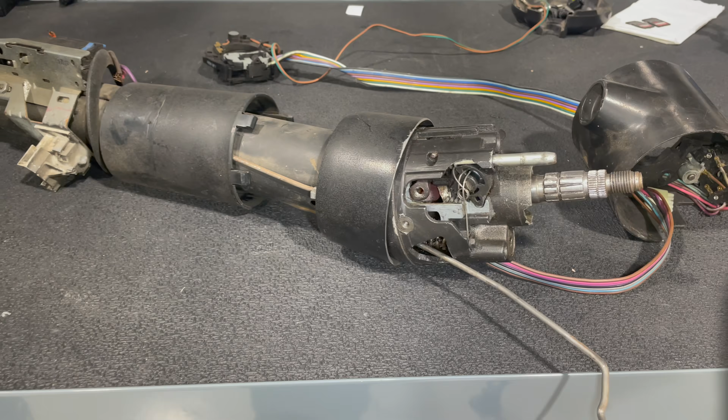Here is the column out of my Blazer that I replaced with an Ididit column several years ago. This guy is obviously broken, and that's the challenge with this. It is an aluminum and steel construct, and if you're not careful, you can end up breaking either the collar down in here, which this bolts to and tightens everything up, or you can break this guy, and then you're kind of out of luck.

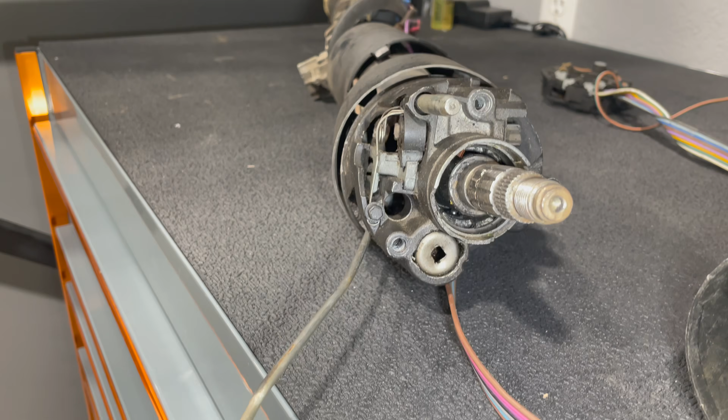These things are hard to find. You can pull them from junkyards, but they often need a rebuild. So if you can take care of your column, treat it well, you'll get a long life out of it with no problems, and they're fairly easy to service before you break anything. Once you break some of this stuff, all bets are off.

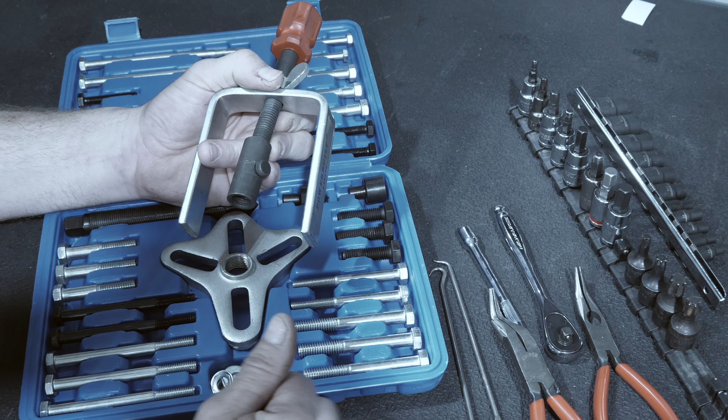There's just a few tools you're going to need for this job, or tools that will make your life a lot easier. First and foremost is this guy, used to depress the plate that is holding the retaining spring in place. You thread this down over the center nut or center bolt on the column, and then use this wing nut to depress these legs, which will hold the plate down. Then you can use some picks, a screwdriver, pliers, assorted needle nose, whatever it takes to get that lock ring off. It can be a little finicky, and these tools can make a huge difference.

The other thing you're going to want is a steering wheel puller. It goes over the column like so. This guy is driven down inside, and then this pin pushes down on the column while this pulls on the steering wheel and pulls it off. These are very useful to have. Just grab one, put it in your toolbox. You'll be happy it's there when you need it.

The other thing you're going to need is an Allen key set and a Torx set. I recommend just buying an assorted set of Torx. These are the ones you're going to need: this is a T30, needed to remove some Torx heads inside the column. In addition to that, you're going to need an E8, right here. That's what these look like inside. That's what you're going to want to tighten the bolts when we get down to it. A quarter-inch drive is the best way because it's much thinner than a 3/8. So if you can get a quarter-inch drive, you'll be ahead of the game.

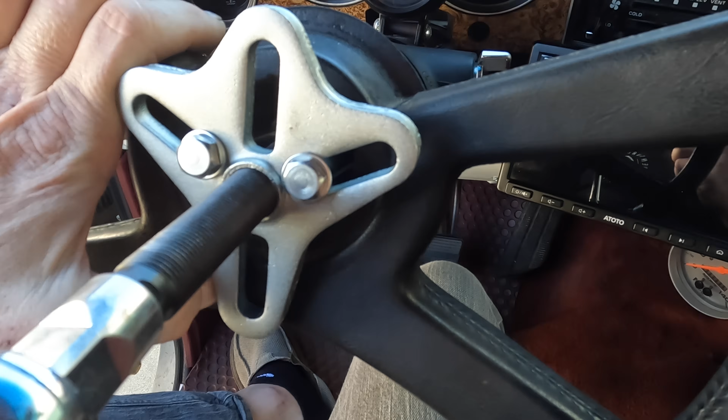Let's take this one apart and see if we can fix it. When you put your steering wheel puller on, put the washers under the bolts that correspond to the holes that you've got. Make sure it's lined up so it's not going to torque. Then you're just going to tighten this guy down until your steering wheel comes off, and you're left with that.

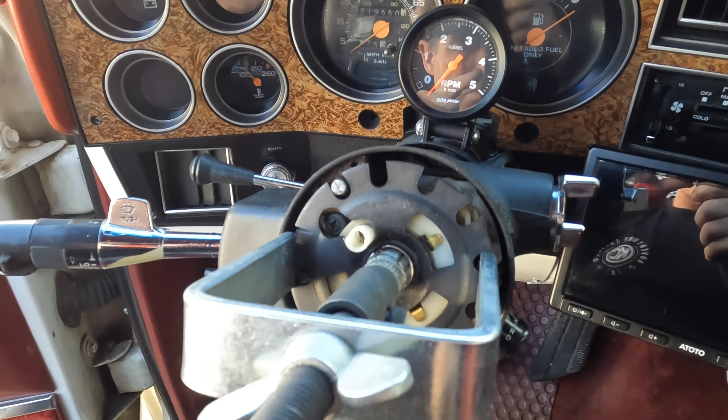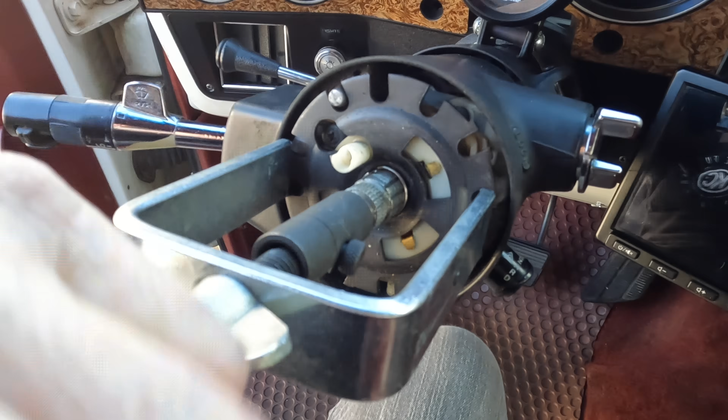It's going to make your life a whole lot easier if you have one of these tools. This is to help remove that snap ring down in there, and to get it out. Let me back this off. You'll see as I back off this wing nut, this plate is held on by this. So to get that snap ring out, you need to depress the plate so the snap ring can come free. It's possible without this tool, but it can be a pain in the neck.

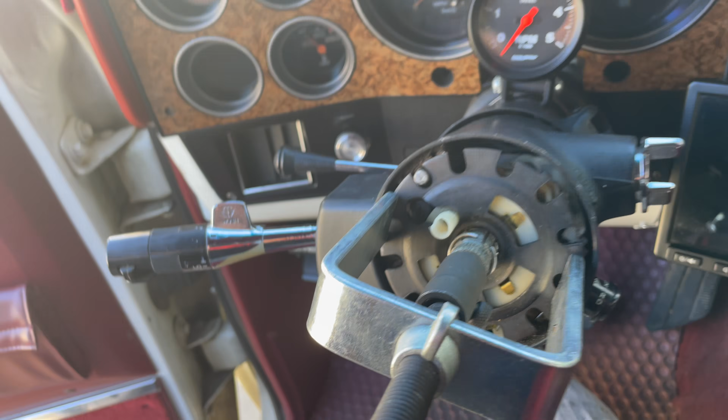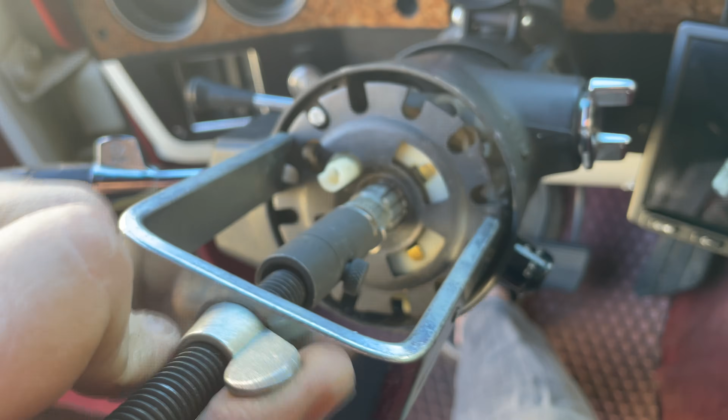A combination of pliers and picks is usually the best way to get this guy off. Then you can release the wing nut, and this backing plate will come off.

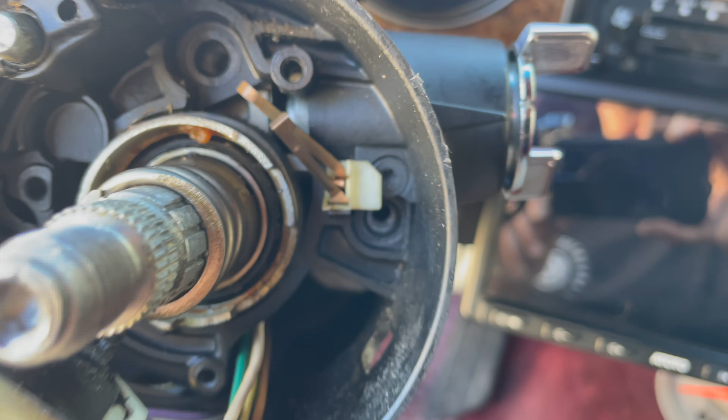Next, you're going to want to remove these T30 screws from here, here, and down there. Once those are out, you'll get to this one right here, can you see that one? That one releases your lock assembly. Once you've pulled your column adjust, this assembly should slide off.

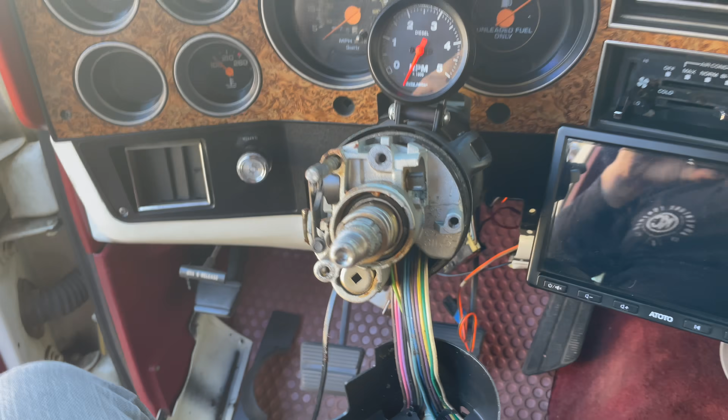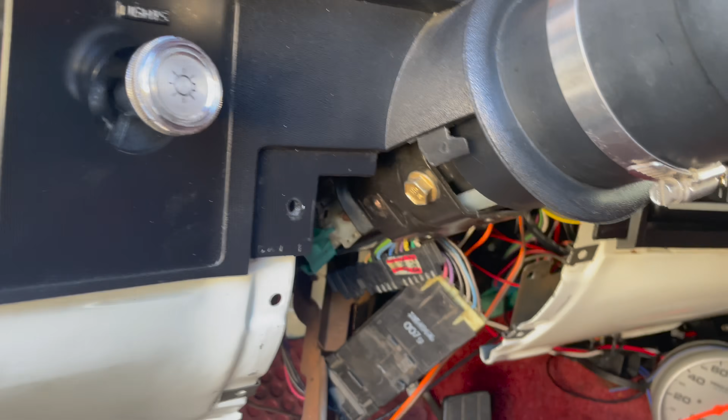So this next part is a little tricky, but don't stop, you're doing awesome, so just keep it up. To get this assembly off, you're going to have to remove these two bottom panels. It's just 2 or 4 screws on each side, not very difficult.

Remove that stuff and then undo this guy so you can slide your connector back. That will give you enough slack to get the safety collar off of it.

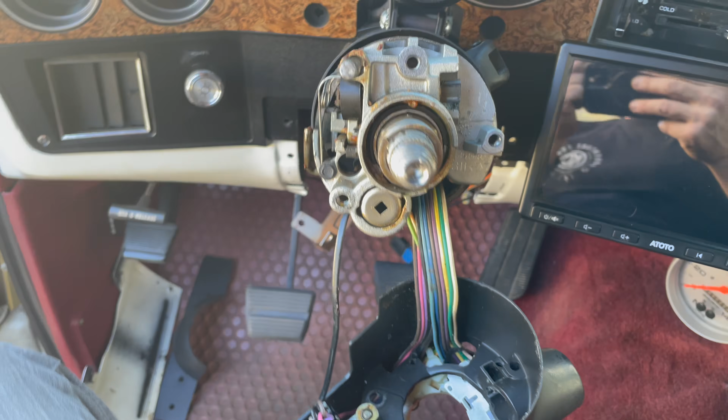Now some stuff will fall out of this, see? So I'm going to have to figure out where that goes, but don't stress it, you're doing awesome. Do you guys see that one down in there?

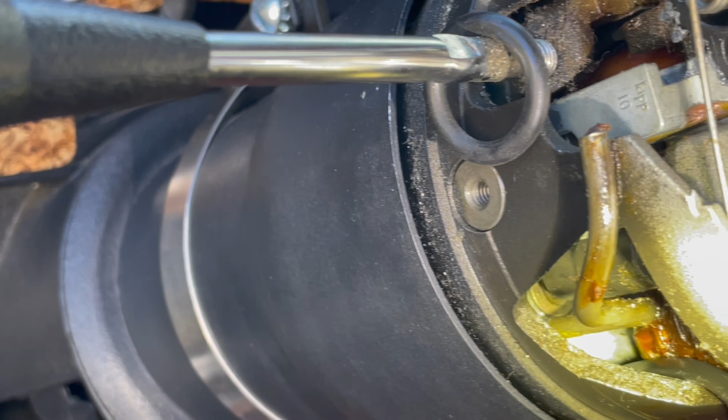So look how... I'll get you to zoom in there. But you see how loose it is? That's our problem right there.

Let's tighten this guy up.

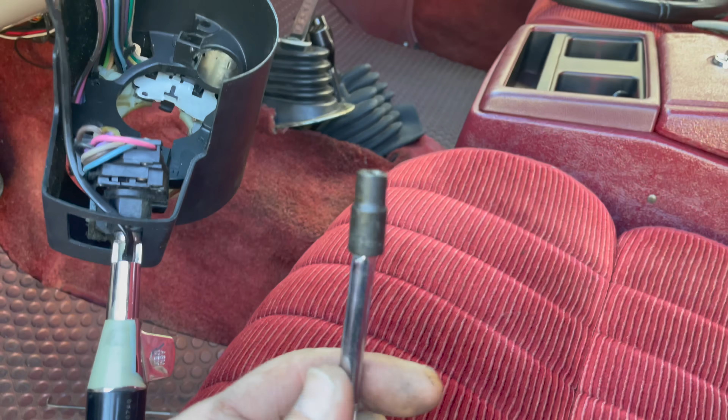This particular bit is an E8, that's what you're going to need. I'm using a 1/4 inch drive to get all the way down in there. I think I've still got another one to get to also.

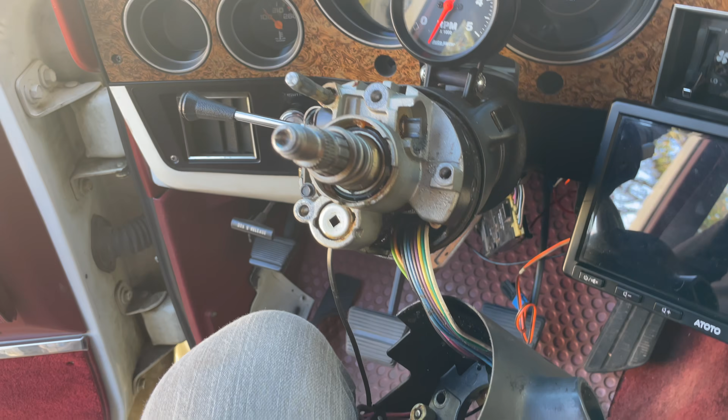Okay, so it looks like we had success, no more movement to this thing. So let's button it back up, and hopefully it functions the way it did when we took it apart. That's the real test, right?

Once you've got everything back together, make sure to put that lock ring back in. You'll need the tool to push down the plate and get it seated. Then you should be ready to put your steering wheel back on and celebrate how awesome you are.

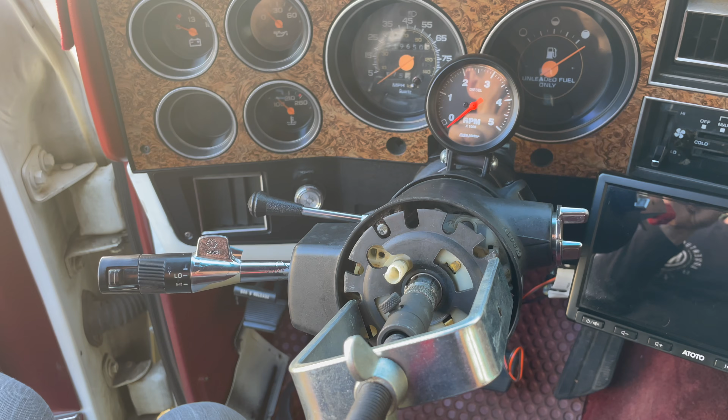Now, after you've finished, make sure you have some spare parts left over so you can practice pulling it apart and putting it back together one more time. You thought the lesson was over. Now go ahead and tighten it up again, and take a look around and notice you don't have any spare parts, because you did an awesome job. Give yourself a high five.

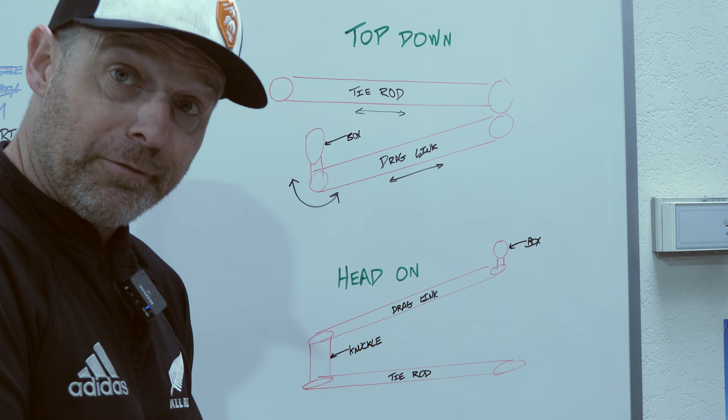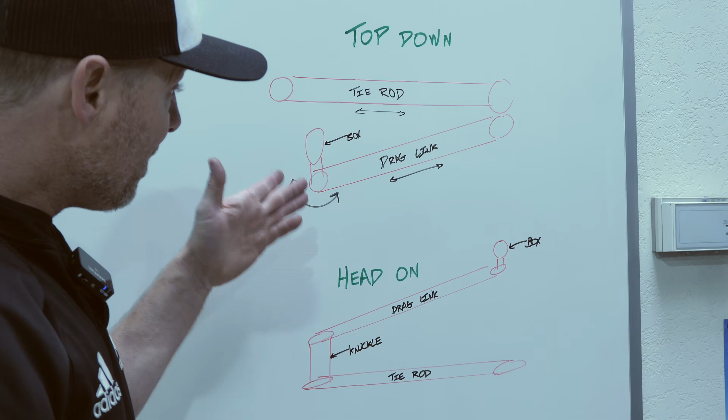I want to give you guys a quick run through of the names and parts of my steering system, because I'm going to be fixing the cockeyed steering wheel that has been plaguing me. I have to drive down the freeway with my steering wheel 90 degrees off to maintain a straight direction, and that's because my draglink and tie rod need adjustment, or my draglink needs adjustment.

So in my situation, we're looking at the top down, a bird's eye view. You're going to see your tie rod connecting the driver and passenger side. Then you have your draglink that goes from the pitman arm, this is your steering box, your pitman arm. Then you have the draglink that connects over to your steering arm on your passenger side. The steering arm is connected to the tie rod through your knuckle, which is hard to visualize from the top down.

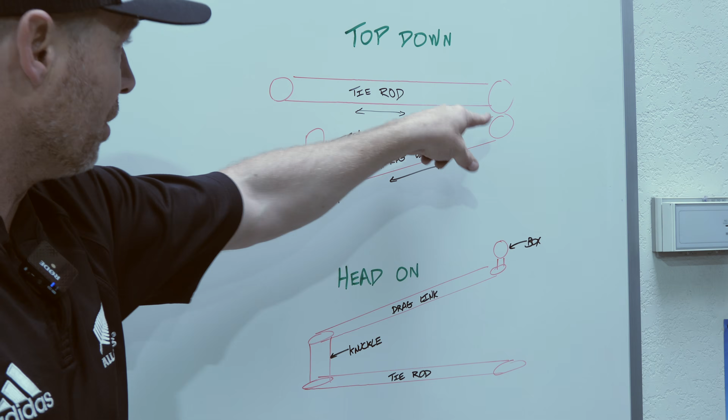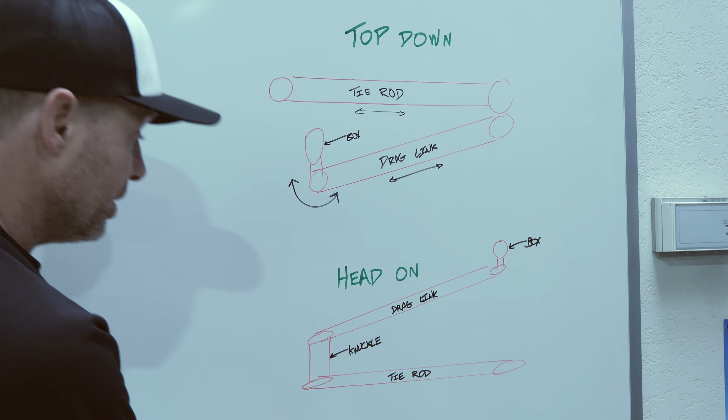On the head-on approach, looking at the truck from the front, you're going to see your tie rod connecting your driver side wheel and your passenger side wheel. You have your knuckle right here, your steering arm right here, and your draglink going back to your pitman arm and your steering box.

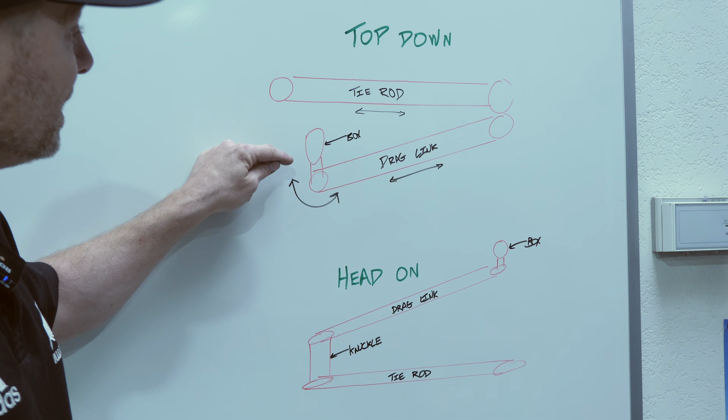The only thing that moves or dictates the movement in here is going to be your pitman arm. When you turn your steering wheel, the sector shaft on your box turns and drives the draglink one way or the other, and the tie rod comes along for a ride.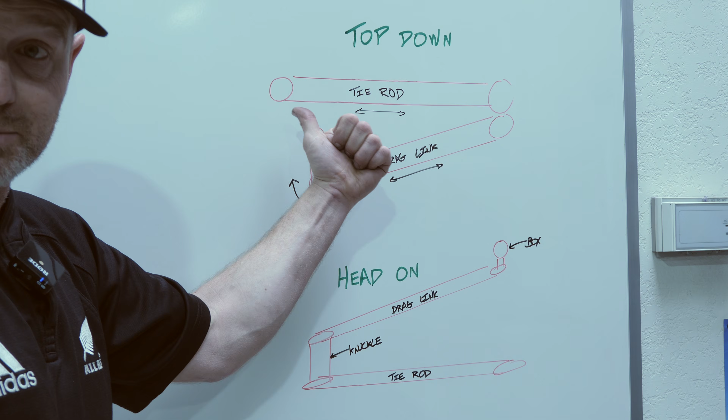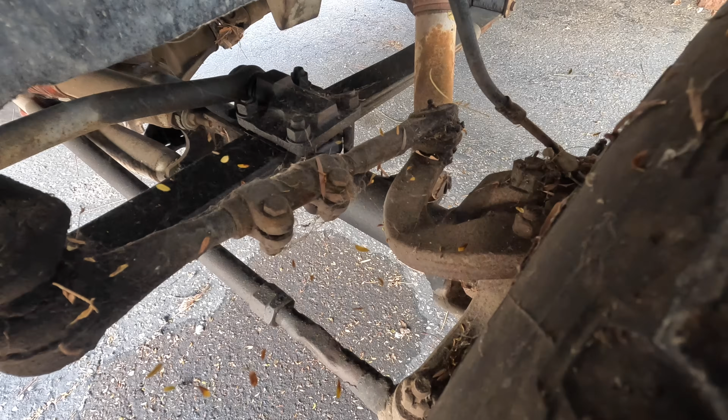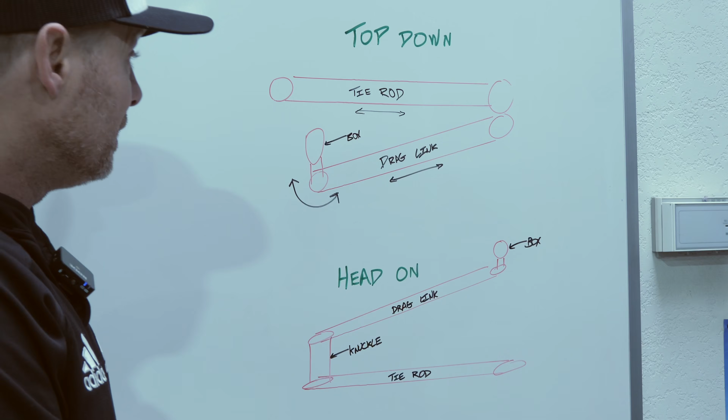Now, this is an aftermarket steering setup. I am not a big fan of the Squarebody, the original factory steering. It takes the drag link and moves it to the steering arm on the driver's side, and that involves a lot of linkages and joints and just areas for inherent slop, looseness, and problems to arise. So this is generally what I recommend to pretty much anyone: if you're getting a Squarebody, get rid of the factory stuff and go to a drag link and steering arm setup.

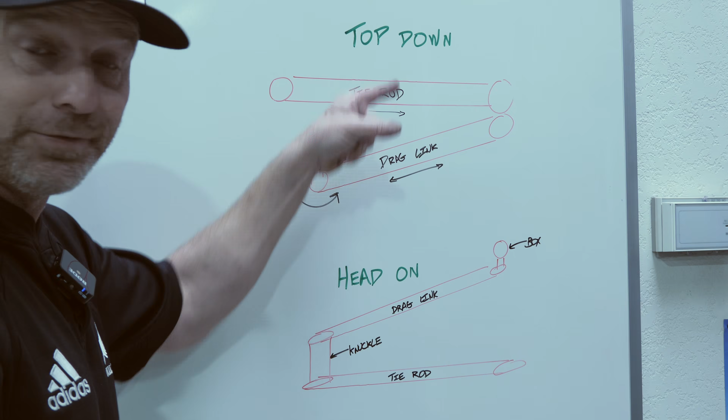This is called high steer. This is called crossover steering. Sorry, high steer is when you bring the tie rod up above the knuckle, so that would ride up here. This is called crossover steering or high steer - it's one of those, I always get them confused. Anyway, these are the components that are moving.

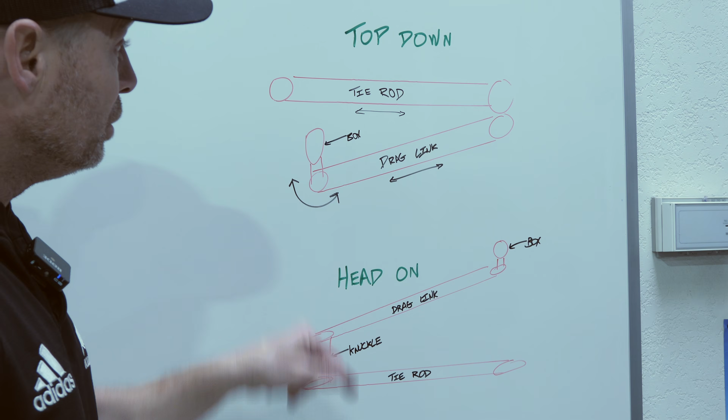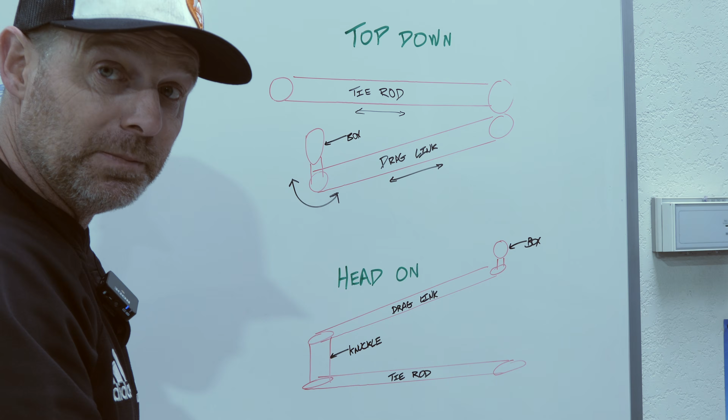What we can do is we can shorten the drag link, and that will change the orientation of the steering wheel. Let me show you on our next whiteboard. Man, I should have been an engineer with these high quality drawings that I'm throwing up for you guys.

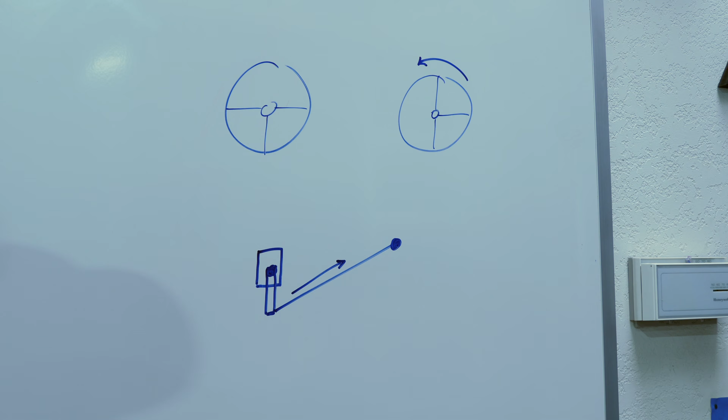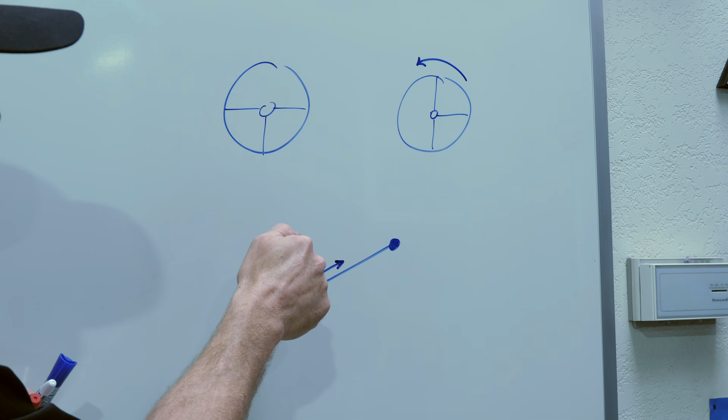This is a steering wheel. That is how my steering wheel looks right now. So when I'm driving, it is clocked counterclockwise 90 degrees. That is so I can maintain the wheels being straight. What that means is I turn the wheel counterclockwise, the steering column comes down to the steering box, and out of the bottom of the box, the sector shaft pushes and pulls the drag link.

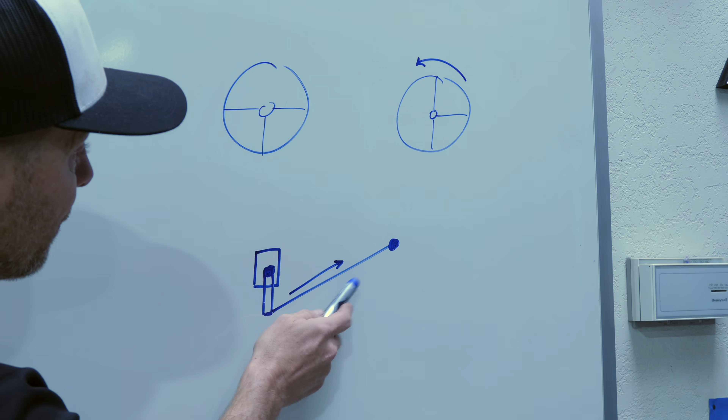What I need to do is shorten this distance. So I'm gonna take maybe 1/8 of an inch or one turn out of the drag link to bring this steering wheel back into the correct orientation. It looks a little more complicated than it really is. It's actually very, very simple.

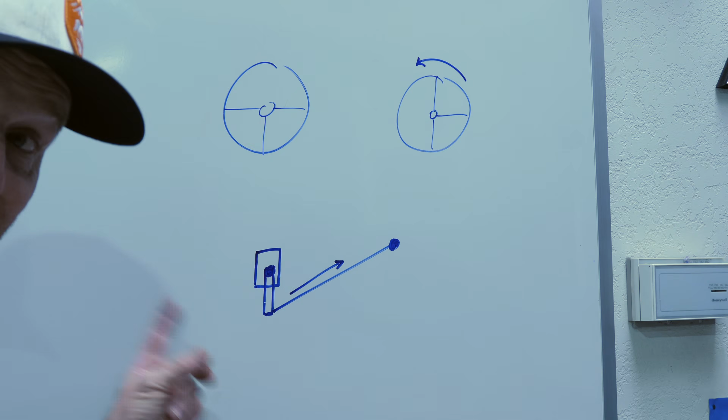I'm gonna show you guys right now how we fix it. But you've gotta do some mental gymnastics to figure out which way to move your drag link to get everything to line up again. Now let's go out to the truck after we've got all this in our head and do it in real time.

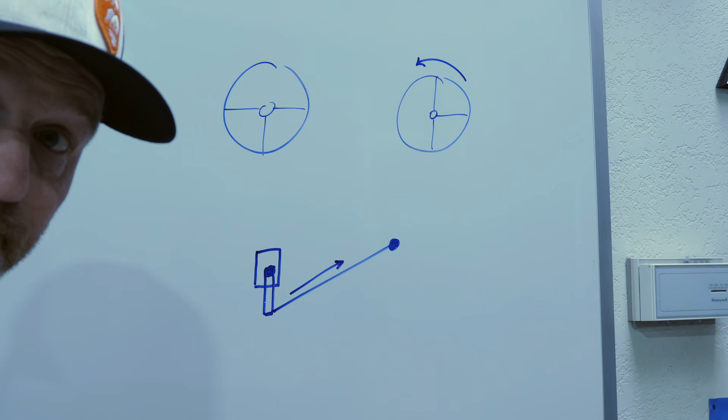Yeah, as you can see, this is how my steering wheel is when I'm driving down the street. But at least it's not loose anymore. Let's fix this.

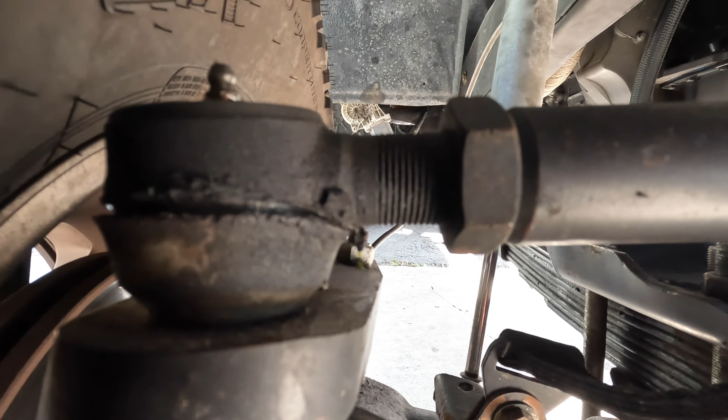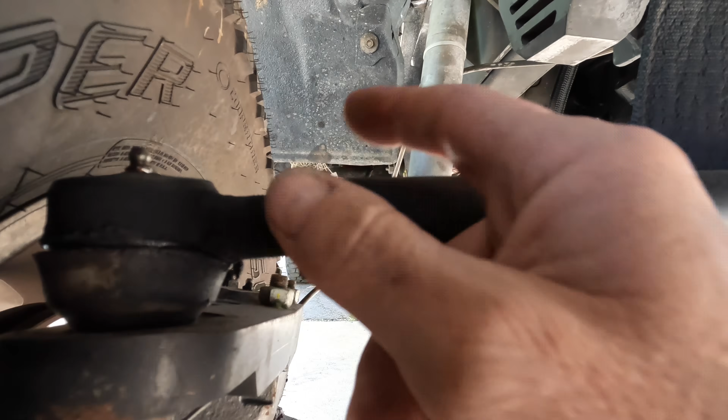It's important when we start for you to get a visualization on which way this lock nut turns. You can see the threads right here. The reason being is the driver's side and passenger side are going to be opposite threads, so that when you turn the drag link, it's not just going to push it both one way or the other, it's actually going to suck them together. So I'm looking at this thread pattern and I can tell that I need to rotate this counterclockwise to loosen this guy.

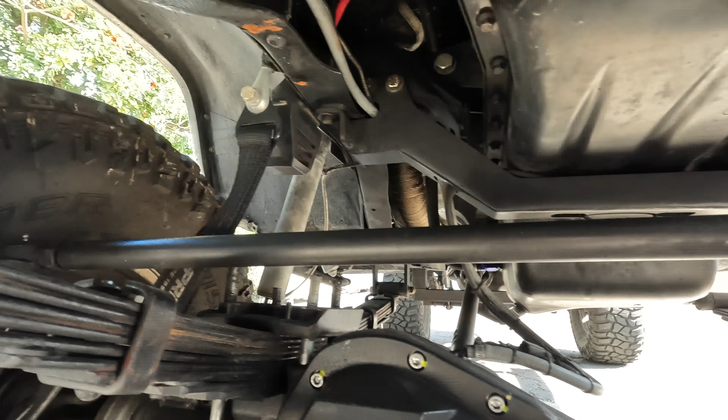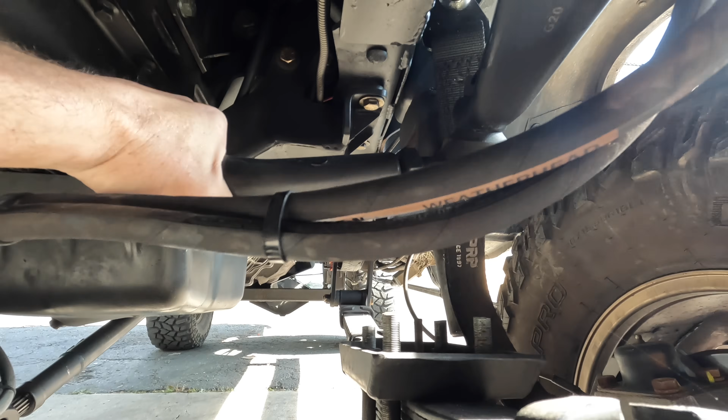Okay, now that I have both of the lock nuts undone, I am going to tighten this guy, which means I'm going to move it. One, let's try 2 full rotations. That's kind of difficult with one hand here, but whoops, sorry guys. Okay. Lock these both back down.

And go take it for a test drive. There you have it, rolling down the street, nice and straight.

Well, I hope you guys feel accomplished, because if you just followed those easy steps, you have just fixed your steering. These trucks are not that difficult to work on, they just require a little bit of patience, brute force, and some creative thinking. I do recommend that if you are looking to upgrade your Squarebody and you have not addressed your steering yet, make that a priority. I think that you can dramatically improve the function, performance, and safety of the vehicle by replacing all of the old outdated steering linkages and all that jargon malarkey mess.